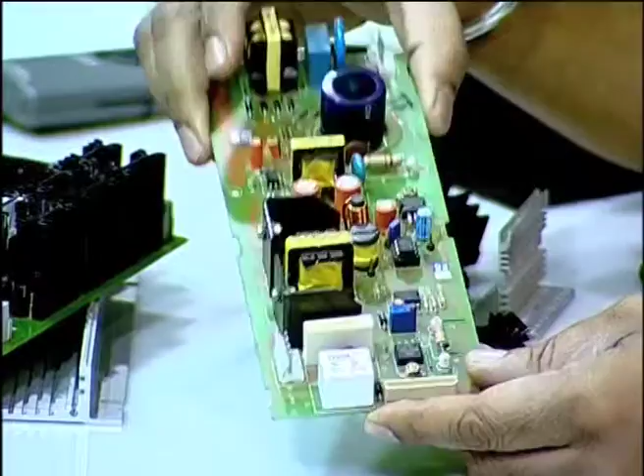If you look at the PCBs, many printed wiring boards which have power components in them will have some form of heat sinking done which will remove the heat from the components.

Look at this particular component. This is nothing but an aluminum plate bent in the shape of an L. Look within, you will see the component here. This is a TO-220 package component mounted on the PCB. The leads are mounted on the PCB right here, or maybe it is clearer here, and the body is affixed to this aluminum plate, which will act as a heat sink.

This is a very simple heat sink, but you have different varieties of heat sinks. For example, take this particular board here, where the heat sinking is by extruded aluminum lengths. These are aluminum extrusions, and inside you will see the components placed. The leads come out here, three leads, which are those of the components, and these are also used basically to keep the junction temperature of those particular power components cool.

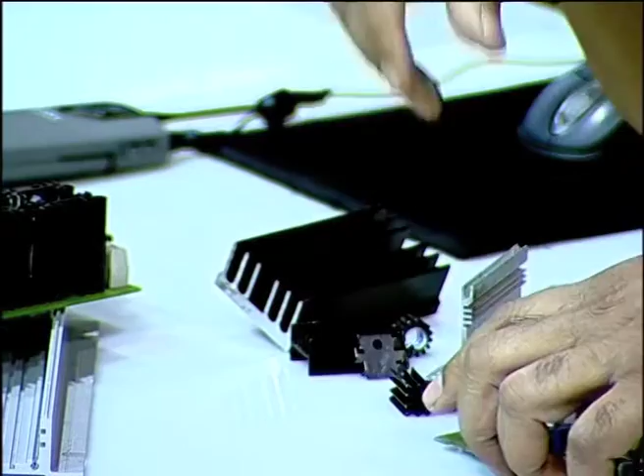You see another type of heat sinking here. Likewise, you have different shapes. There is another heat sink which is of a different cross section. This is also aluminum extrusion, another PCB mountable heat sink.

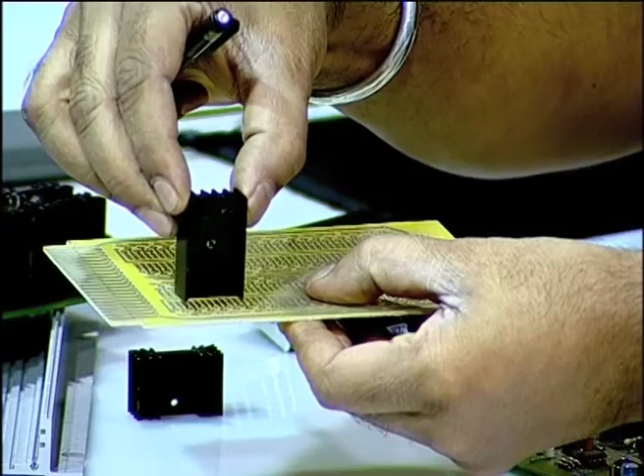You have a possibility of attaching it to the printed wiring board through a screw, here a mounting hole. The component will be mounted here and onto the PCB, which will probably fit something like this. We mount it in this fashion with the component leads going into the PCB.

You also have these type of cylindrical cross section heat sinks. These are for the TO-5 package type of devices which are circular, maybe op amps also, and some BJTs which have a circular cross section like that, and it is fixed around that, and mounted onto the PCB like that. So you have many such heat sinks.

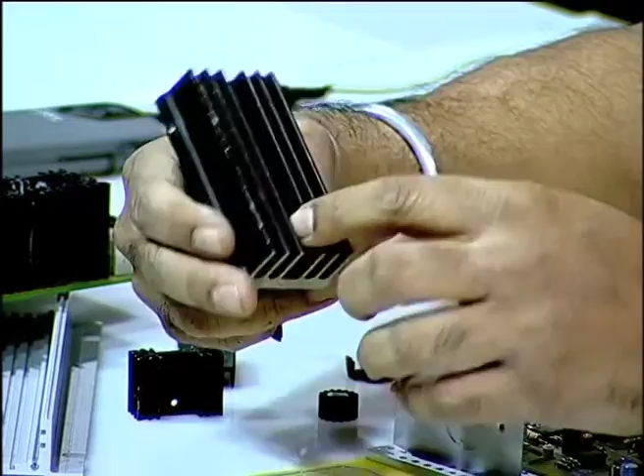This is another type of extrusion piece with components mounted through that. The leads will go in through these holes and onto the PCB. You have another type of a bit more heavier heat sink with a different cross section here. The components are mounted inside and fixed to the enclosure through these mounting holes.

So you have heat sinks of varying sizes, still further bigger ones, depending upon the type of heat that has to be removed from the junction. The culprit, of course, is the heat source actually at the semiconductor junction, and the semiconductor junction is the source of heat which is actually coming as a consequence of current flowing through it and a potential across it.

And therefore, today's main discussion is on the thermal aspects. This is what we will be talking on.

The junction temperature in most semiconductor devices that you will be using would have an upper limit of 150 degrees centigrade. This is actually the breaking point. You should never go to that, and almost all designs will see to it that the junction temperature is less than 120 degrees centigrade. It should not go beyond that, even at an ambient temperature of 50 degrees centigrade.

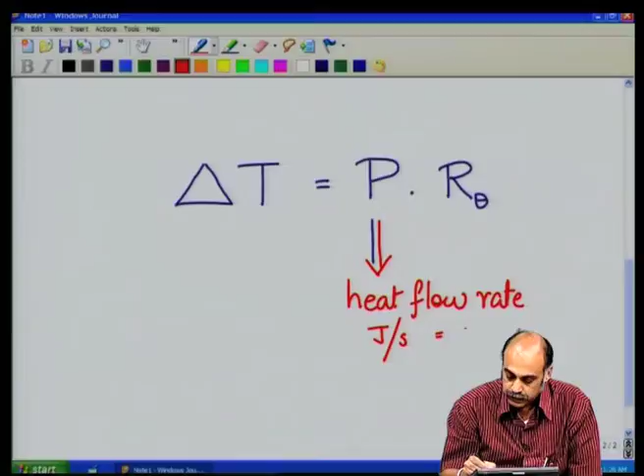P is nothing but heat flow rate. Heat is having units of energy, that is joule, and heat flow rate is joule per second, which is nothing but watts. So heat flow rate is nothing but the power dissipated within that particular component.

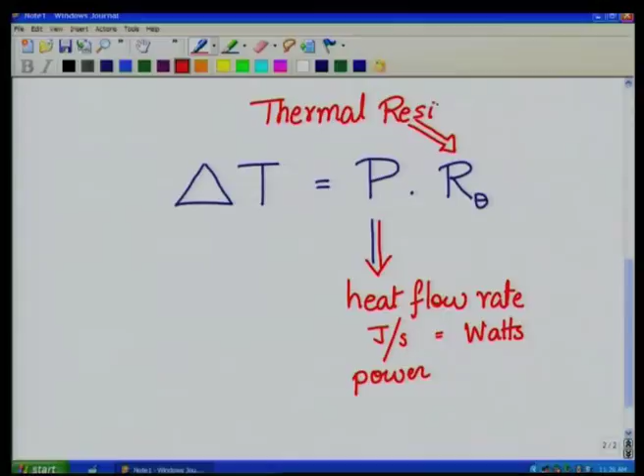And you have another parameter which comes here, which is the property of the material, and this is called the thermal resistance. Thermal resistance is not actually the resistance like in the electrical sense. It is not a dissipator. It is only going to impede the flow of heat. It is a measure of the speed with which the heat can be conducted away, can be removed away from the hot source. So this needs to be understood in that fashion. The thermal resistance here just means the speed at which the heat can be removed from the hot source.

Now, this equation is the governing equation, and for electrical engineers they say that this is something equivalent to Ohm's law, as we know in electrical engineering, V which is equal to I into R, something similar to that, but not exactly the same.

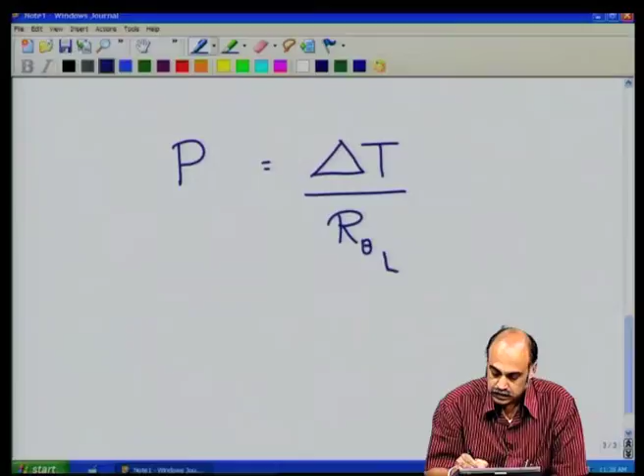Now the heat flow power P, rewriting it, we have the temperature difference divided by R theta or R thermal, this is called the thermal resistance. Now this has a unit. Remember, if you write it in a different way, R thermal is equal to delta T by P, and therefore the units of this is degree Kelvin per watt. Degree Kelvin per watt is the units of the thermal resistance. Keep that in mind.

Now this form is a very generic form, but there are many derived forms, and many literature give this law in different notations and different forms. In order to avoid confusion, let us have a look at the various notations that are there in the literature. They are actually the same thing expressed in a slightly different manner.

Firstly, power sometimes is expressed with respect to unit cross section area, power per unit cross sectional area, given as A R theta. Now what is A? If you have a square block like this, a solid piece of block, let us say this is the hotter side T H, this is the colder side T C, and the heat is flowing from this hotter side to the colder side in this fashion. So delta T is nothing but T H minus T C, and R thermal is the property of this material which is being used. It has an impedance which resists the flow of heat. Good conductors of electricity in many cases are good conductors of heat too.

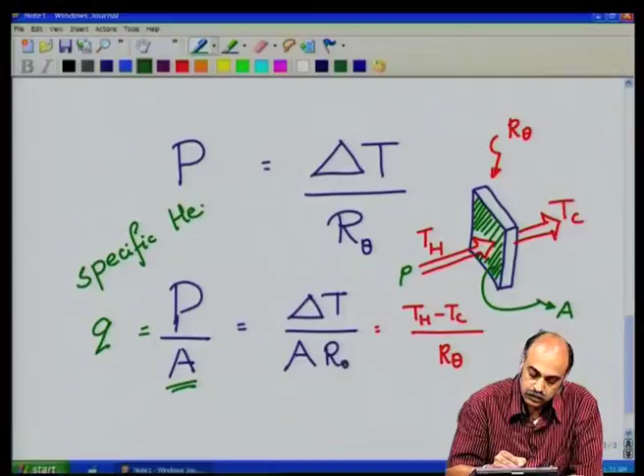Now this particular solid, let us say, has a cross sectional area perpendicular to the heat flow, and that is A. Now that is the A that we are saying power by the cross sectional area is called Q. This is called specific heat flow rate. Q is nothing but the specific heat flow rate, watts per meter square, that is its units.

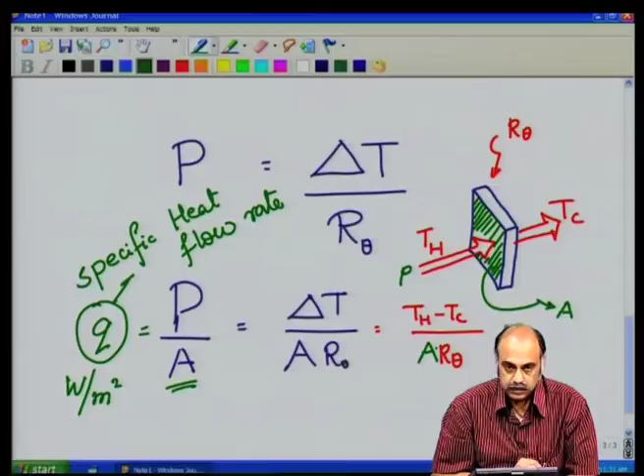So this is one way of expressing this: P is equal to delta T by R theta. You have Q which is equal to P by A, which is equal to delta T by A R theta. Now this A R theta is given a different symbology in many, lowercase r theta. So it is written as delta T by r theta. Now what is this r theta?

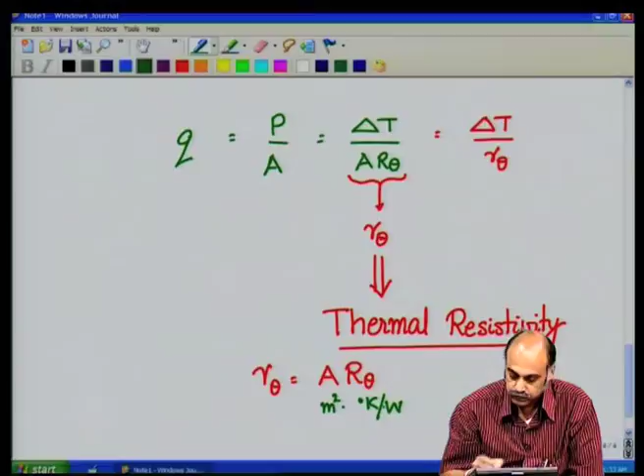This is called thermal resistivity. So we had R, which is the thermal resistance. You have lowercase r theta, which is called the thermal resistivity, which is given by this relation: A into thermal resistance. So you have the units for this, meter square into degree Kelvin per watt. So thermal resistivity is expressed in the units degree Kelvin meter square per watt. So this is one way of looking at it.

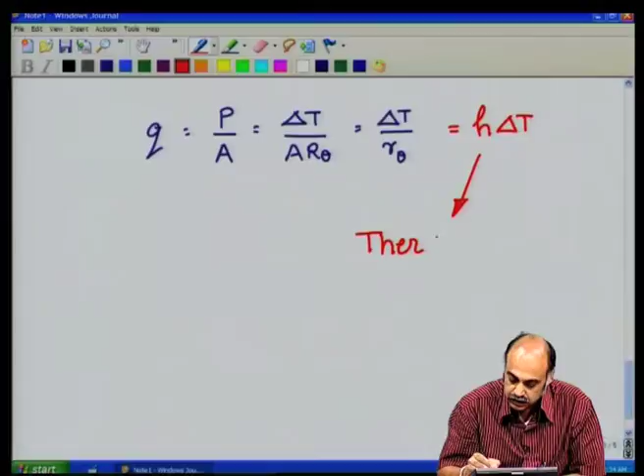So what do we have? We have Q, the specific heat flow rate, which is given by heat flow rate by the area of cross section perpendicular to the heat flow, which is given by delta T by A r theta, which is given by delta T by lowercase r theta, called the thermal resistivity. Now to this there is a different notation: it is equal to H delta T. Now our H is another constant used in many literature, and this is called the thermal coefficient.

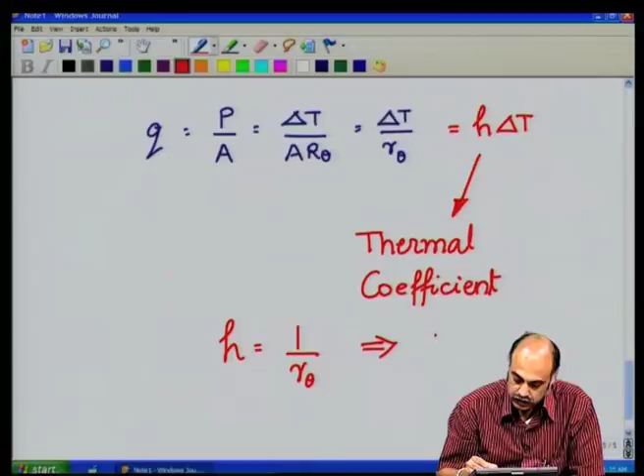H is called the thermal coefficient. It is nothing but 1 by lowercase r theta, 1 by thermal resistivity, and therefore its units: we know that thermal resistivity has units of degree Kelvin meter square per watt. So thermal coefficient will be watt per degree Kelvin per meter square.

So this is another way of expressing the same heat flow equation relationship. There is one more way of expressing the heat flow relationship. Let us take a similar situation where you have a block with temperature T1, the hotter side, and heat flow in this fashion. The area of cross section perpendicular to the flow of heat we shall call A, and the thickness of the block we will call delta x.

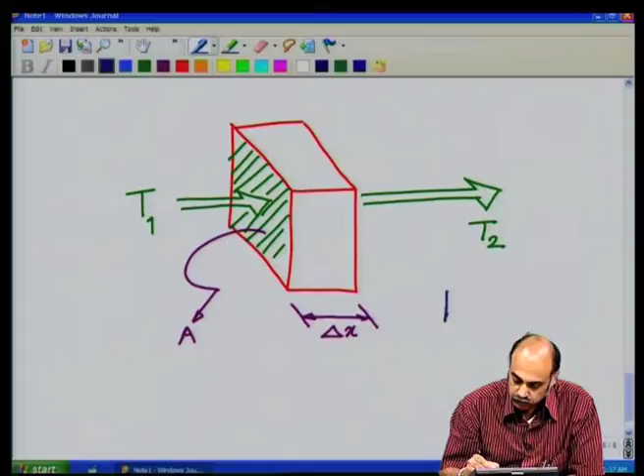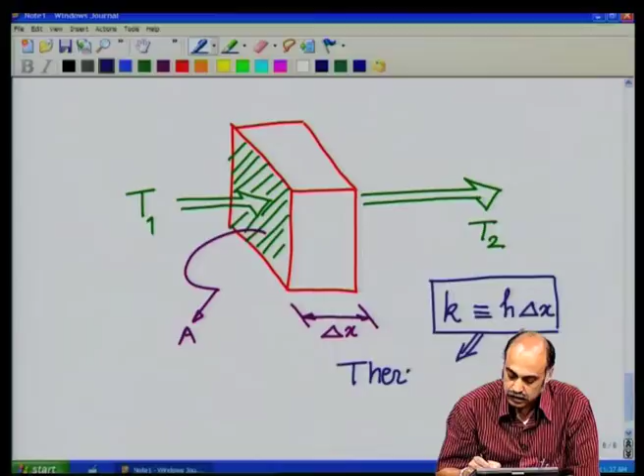Heat is flowing to the colder side, which we call T2. Now the property of the block, which we normally express in terms of thermal resistance, thermal resistivity, or thermal coefficient H, we have one more constant K, which defines the property of the material. This is defined as thermal coefficient H times delta x. This is called in the literature as thermal conductivity, a very popular notation used in many literature, and this gives the famous heat equation form.

So if you take the thermal conductivity K, expressed as H delta x, and we know that the units of H are watt per degree Kelvin per meter square, but there is a delta x in the numerator, so it becomes per meter. So thermal conductivity has units of watt per degree Kelvin per meter.

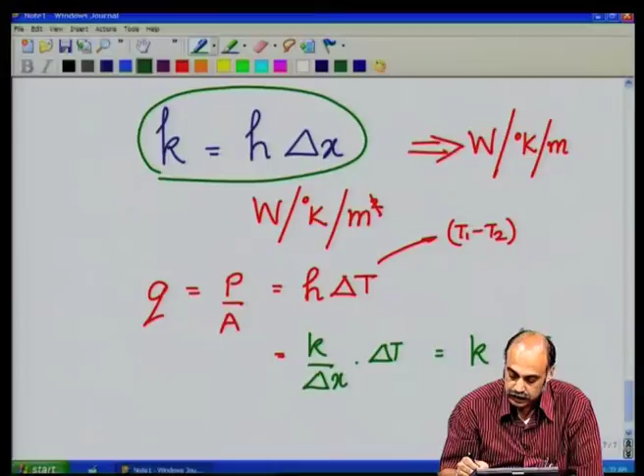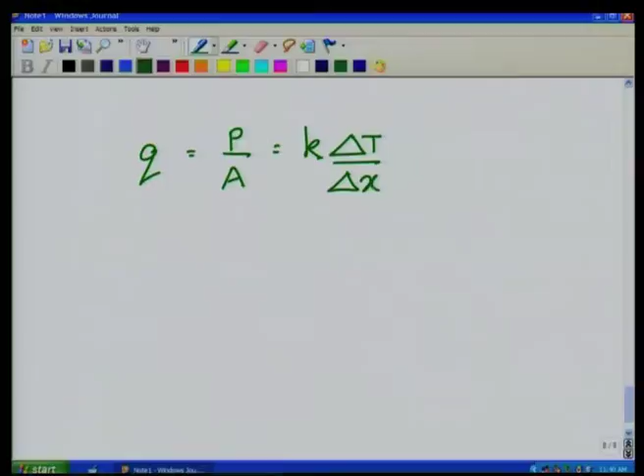So now going back to the equation, Q, the specific heat flow rate given by P by A, which is equal to H delta T, thermal coefficient into the temperature difference. Now this temperature difference is nothing but T1 minus T2 in the case we just described. And if you want to make use of the thermal conductivity equation here, H can be written as K by delta x, so H delta T is nothing but K delta T by delta x. Therefore Q, equal to P by A, equals K delta T by delta x. This is the famous heat flow equation, also written in this form for continuous temperature gradients with respect to distance through the solid.

So this is a very popular expression used in many literature. You should be aware of these things. You saw the same notation used in different forms. Let us summarize so you do not get confused at this point.

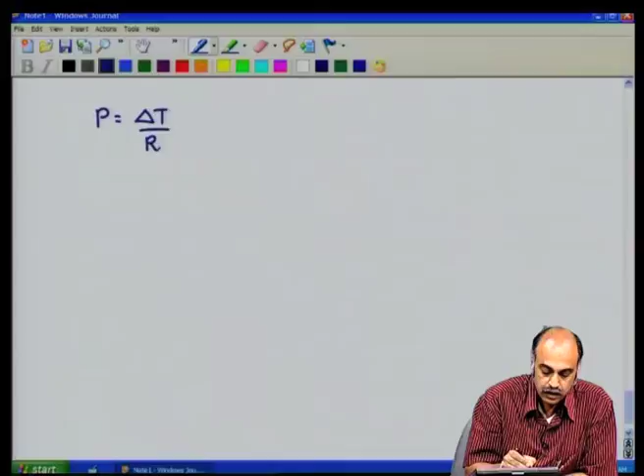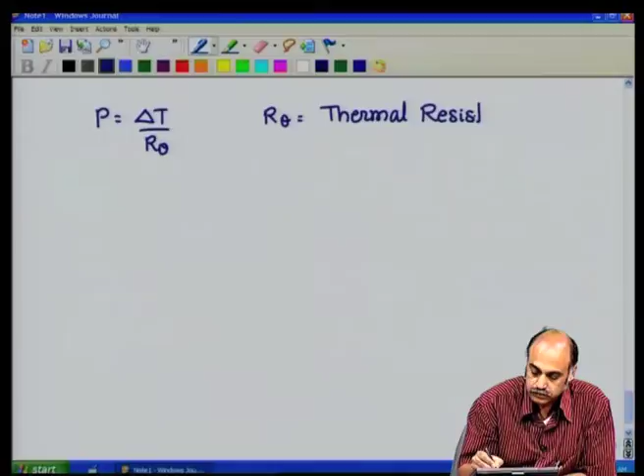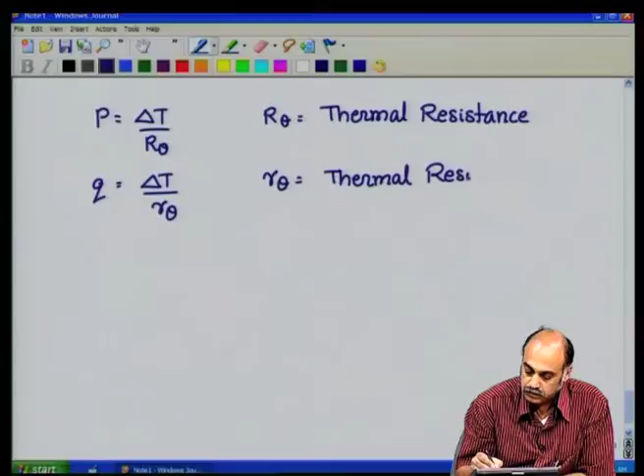We started with P, equal to delta T by R theta, where R theta is called thermal resistance. You have Q, equal to delta T by lowercase r theta, where r theta is the thermal resistivity. You have another form, Q equal to H delta T, where H is called the thermal coefficient. And you had the other form, Q equal to K delta T by delta x, where K is called the thermal conductivity. So these are the four forms that are very popular in the literature.

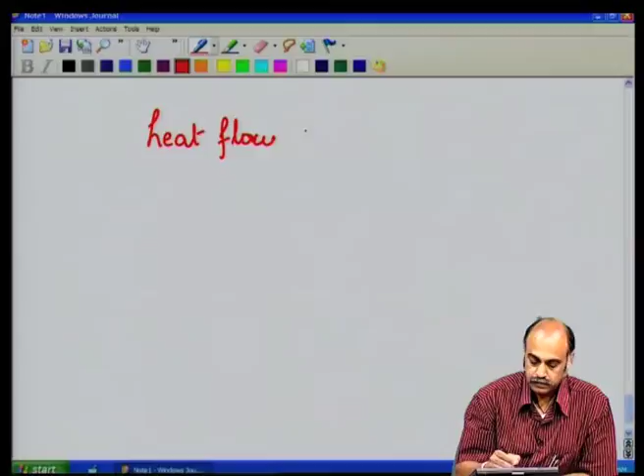You will see these forms are one and the same, except that the notations are slightly different, and you should not get confused when you see one of the forms. You can always convert one form to another: this is nothing but A r theta, this is nothing but 1 by thermal resistivity, and this is nothing but thermal coefficient into delta x. So this is the basic relationship of heat flow rate, heat flow energy, temperature difference or temperature gradient, and the material property.

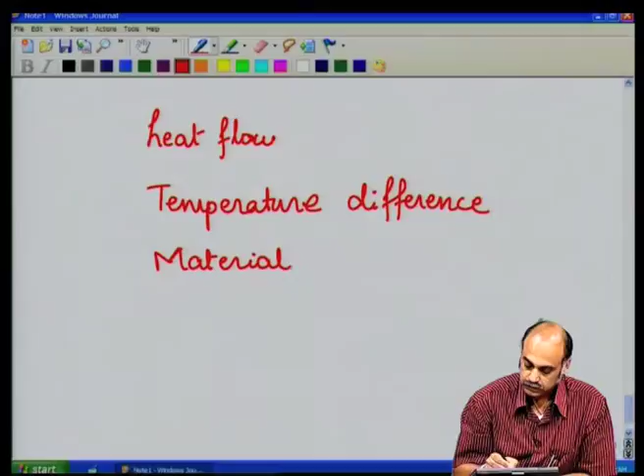The material property is represented by thermal resistance, thermal resistivity, thermal coefficient, thermal conductivity and such. These are measurable quantities. The potential is temperature of the hot minus temperature of the cold, the two points where heat flow occurs. The heat flow rate is nothing but the power dissipated within the semiconductor, which comes from the electrical circuit equivalent analysis. So you know the currents flowing through the various components, the voltage across them, and from that you derive the power getting dissipated within the semiconductor junction, in diodes, BJTs, MOSFETs, ICs, magnetic components, capacitances and inductances. Once you know the power dissipated, it is a matter of getting it into the thermal domain and relating it with the material properties in this fashion.

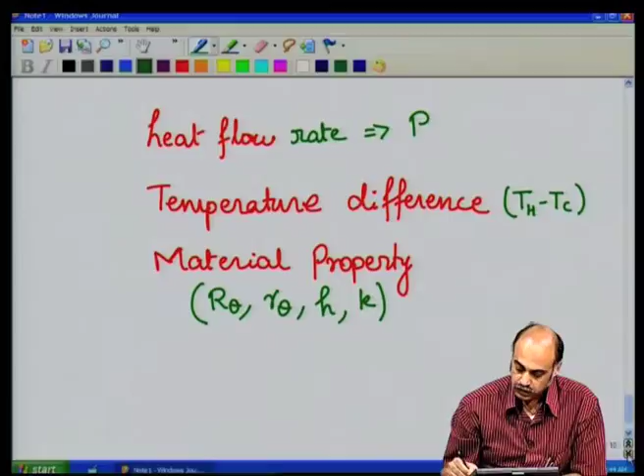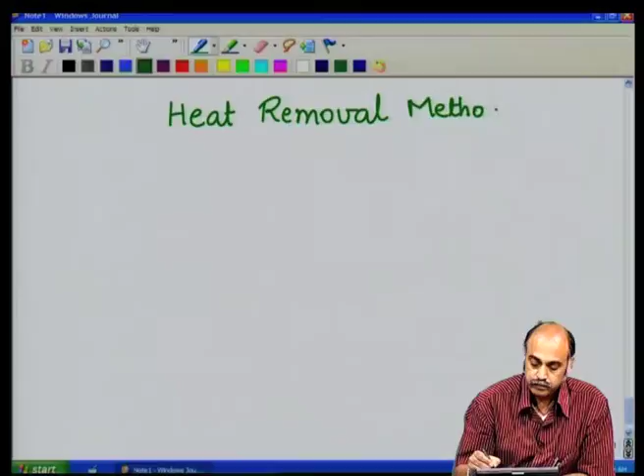So, heat removal methods. Our main motivation for this topic is that there is dissipation occurring within the components, and we want to remove the heat so that we can keep the junction of the components cool enough and working reliably.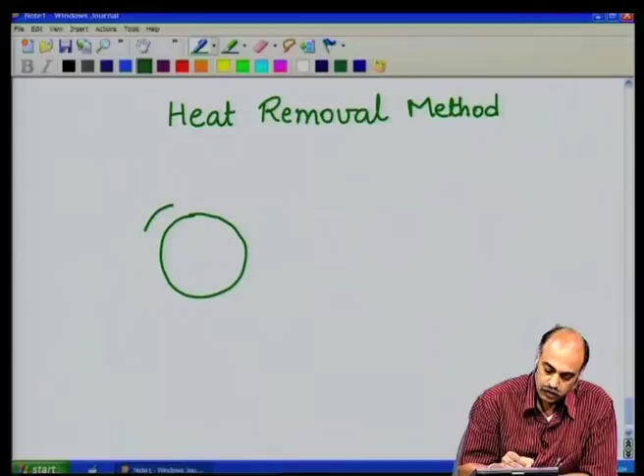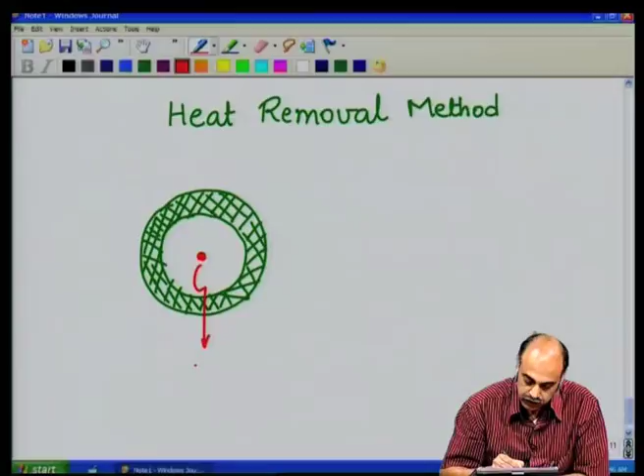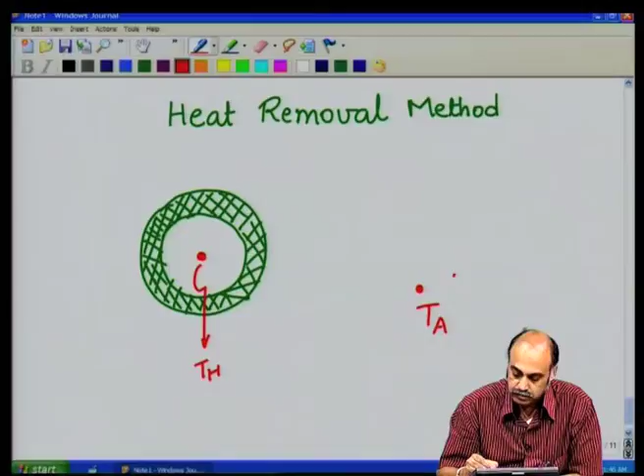Take for example a closed space, having a solid enclosure as shown. This solid enclosure contains a hot spot, shown here in red, which is the highest temperature point in the system, let us say TH. This heat source should ultimately get conducted to the ambient, TA. Let us say the ambient maximum is around 50 degree centigrade, and this hot spot is much greater, around 120 degree centigrade.

Now what all can happen? The heat energy needs to reach the inner surface of the solid, and it can reach in all directions. The inner surface of this enclosure is at some temperature, T surface inner, and the heat is to be conducted from this inner surface to the outer surface, in all directions.

I am showing these wiggly arrows to indicate the heat flow, and the temperature at the outer surface we will call TSO, T surface outer temperature. From this outer temperature the heat is supposed to go out to the ambient in all directions. So this is the typical way the heat flow happens, but let's look at the mode.

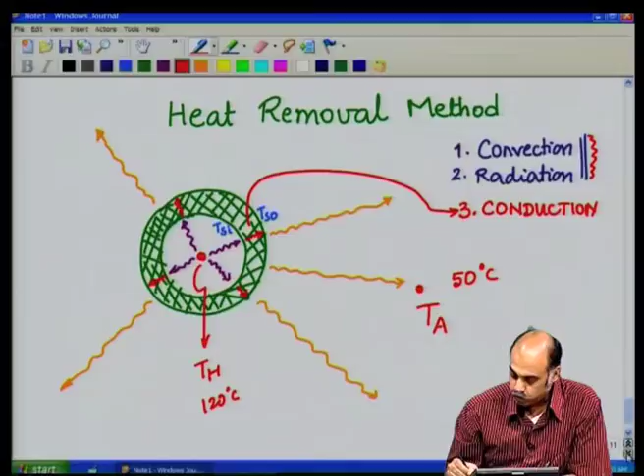Once you are at the inner surface solid, the heat has to get conducted to the outer surface through the solid, and this method of heat conduction through the solid is called conduction. Again, when it reaches the outer surface, it goes through the air or some other fluid medium, again through convection and radiation. So we do not have too many methods to deal with - you have just 3 plus 1, I will explain what that plus 1 is.

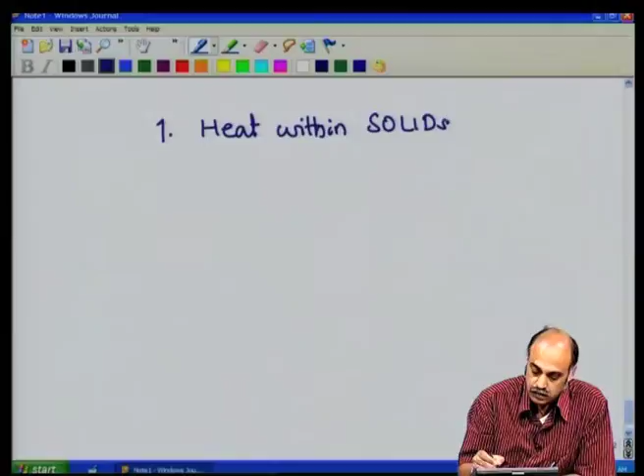Heat flow within solids we call conduction. Heat flow at a solid fluid interface we call convection. So for convection you need to have a fluid interfacing with the solid, so that the fluid is the actual medium which is removing or conducting the heat away.

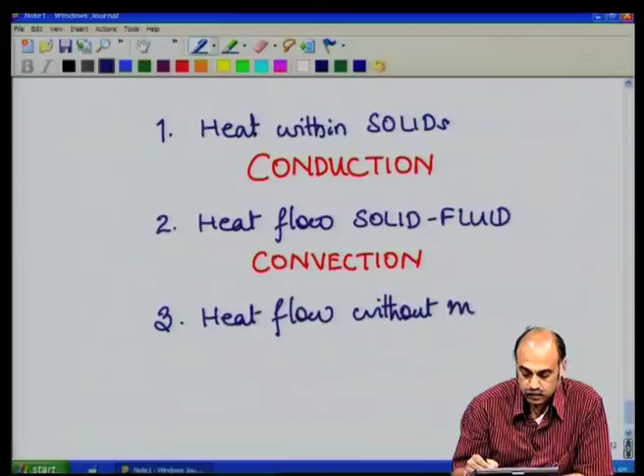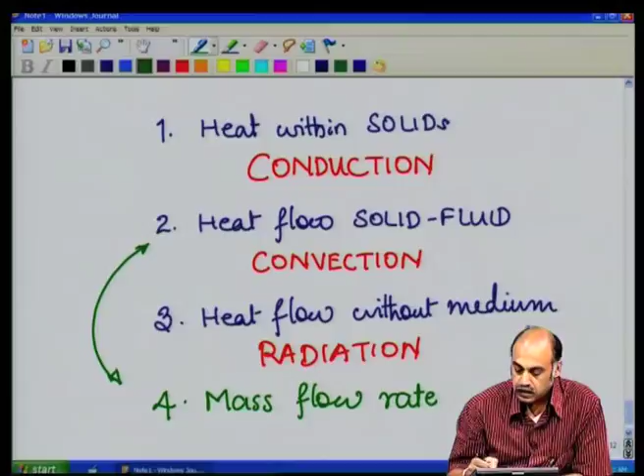The third method is heat flow without a medium, through radiation - this is called radiation. There is one more method, which I shall put in green. It is also in some way linked with convection, also a solid fluid interface. This is called mass flow rate - heat transfer through the mass flow rate mechanism.

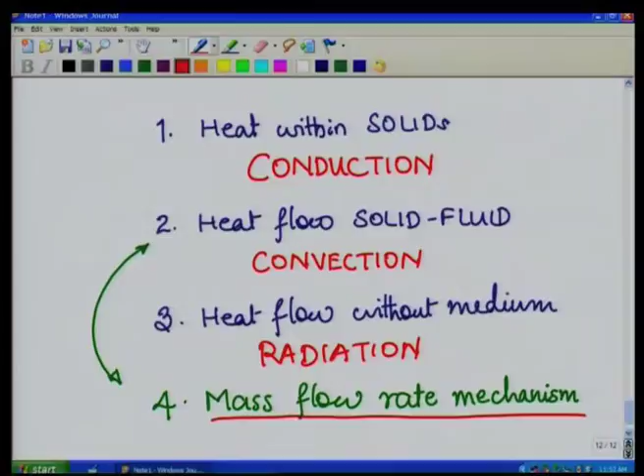In convection, the fluid flow is not tightly controlled or regulated, whereas in the mass flow rate mechanism the fluid flow is tightly regulated. Therefore you have this as a separate mechanism, part of the convection mechanism, and we call that the mass flow rate mechanism. So these are the 4 basic types of methods used for conducting the heat away from the junction.

So now coming to the methods by which you try to remove the heat away.

Let me show some scenarios which will give you the basic idea, probably first a simple explanation with conduction.

So let us take an example where we are trying to conduct heat from the semiconductor to the ambient. Let us say we have some solid material where this portion is the hot portion, at temperature T h, and this portion is the cold portion, at temperature T c. The heat will flow from the hot to the cold in this manner.

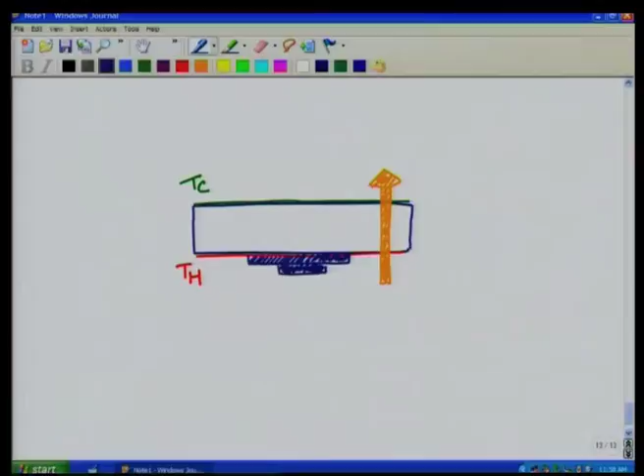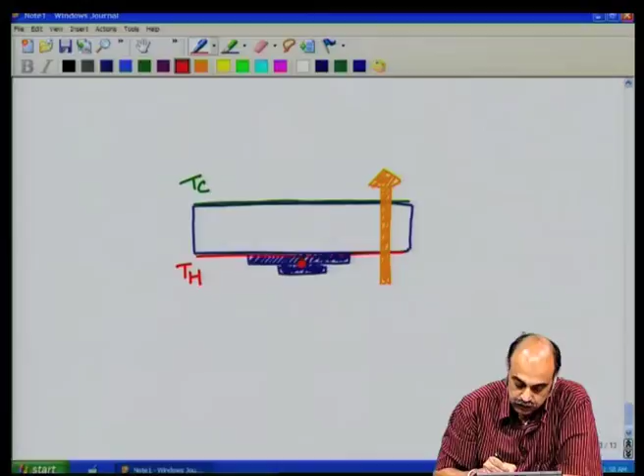Now if you look at these components here in this PCB, you see that this component is fixed to this aluminum plate here. So the hot spot is within this component at the junction, and that has to be removed out to the ambient. So here this component is having a hot spot, and that is called the junction temperature T j.

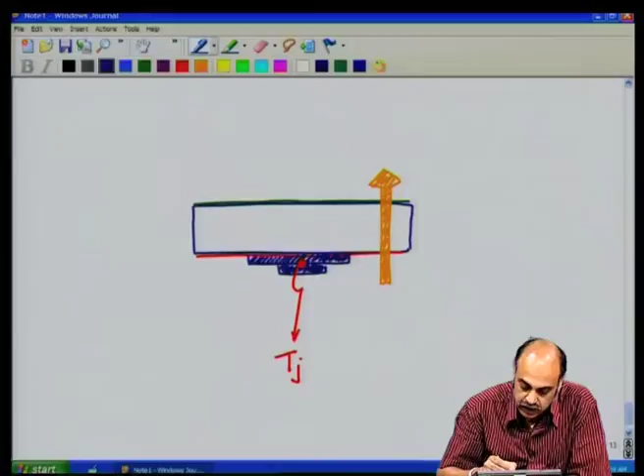Now let me erase this portion, these symbols, and make way for new symbols. The heat flows from the junction, the hot spot, to the case, the surrounding case. The surrounding case, the blue colored one, is at temperature T c, which is lower than the junction, and from there the power flows on to the heat sink, the bottom portion of the heat sink as shown here.

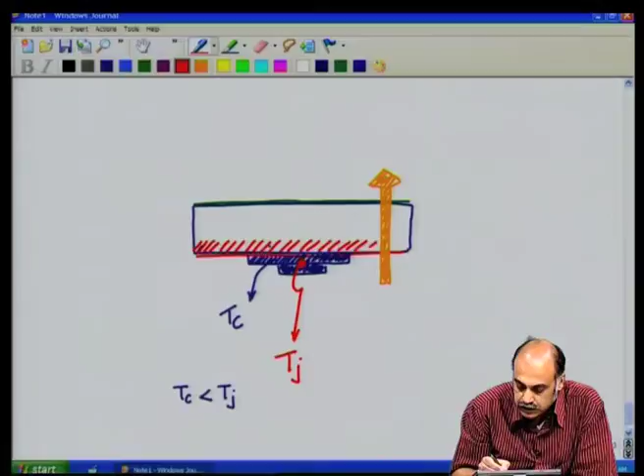Now there is a temperature gradient. You will see that heat starts flowing from the bottom to the top as shown, and somewhere here we will say is the ambient, which is at around 50 degrees centigrade. So the junction is at around 120 degrees centigrade, and we want the heat to flow in this fashion.

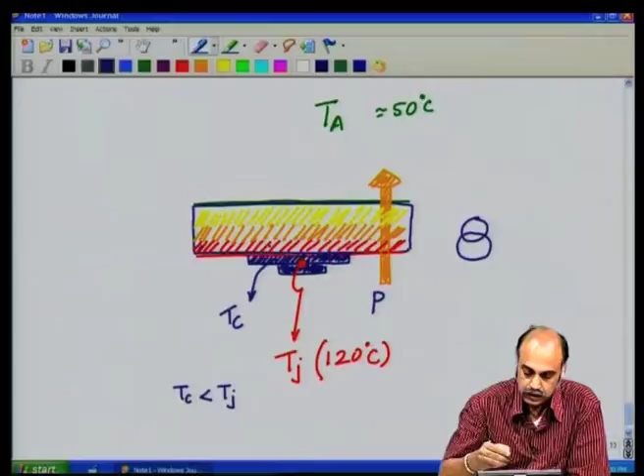Now how do we model this? Okay, so let us, the power flow P, the power flow P is modeled as a current source like this. I will reposition things in a slightly different way. Yeah, is modeled as a power source like that.

Now this power source is basically the dissipation which is happening within the junction. Now the power source which is generated at the junction is at junction temperature with respect to ambient T amb.

Now there is a thermal resistance between junction and the case. So this is the junction, this is the case, and results in a temperature T c at the case, slightly lesser, due to the presence of a thermal resistance R theta junction to case, R theta J C, let us say.

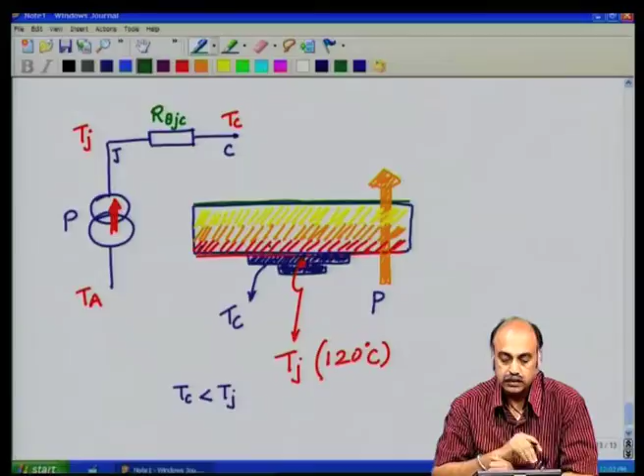Then from the case, the component is attached to the aluminum block or the heat sink block through a compound called heat sink compound, which is supposed to make proper contact with the surface of the heat sink. So that also is going to bring about a thermal impedance from case to sink, giving rise to another thermal impedance, case to sink.

And then from the sink to the ambient, the sink is at sink temperature, the average sink temperature, I will put this one as T s, and somewhere outside you have the ambient. R thermal sink to ambient, there is a resistance there. So electrically you will see that it is equivalent to a current sourced circuit. This is ground and this is ground, a reference potential. The ambient is called the reference potential.

So looking at this figure, it's very easy to get the equation. The R thermal junction to case is the property of that particular semiconductor or semiconductor IC or the component from the junction to its case, which is generally given in the data sheet. This is given in the data sheet.

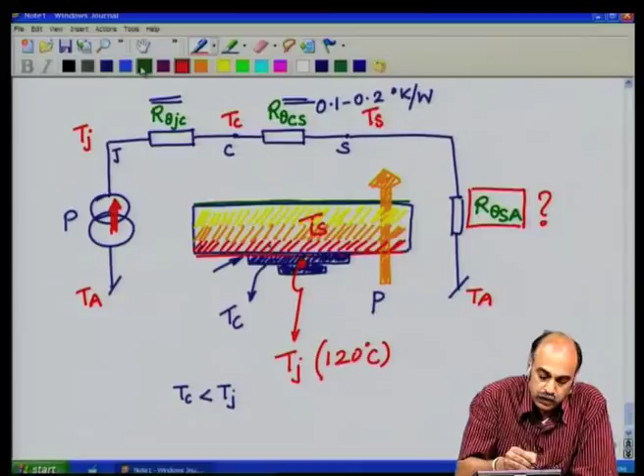So what is the governing equation? We know that P equals delta T by R thermal. This is our basic governing equation. Now let us reframe this equation in the following manner: R thermal is equal to delta T by P, or we should say delta T is nothing but T j, the junction temperature, minus T A, the ambient temperature, divided by P.

This is the total thermal resistance which you see in this whole link from T j to T A. So what is it? That is equal to R theta junction to case plus R theta case to sink plus R theta sink to ambient.

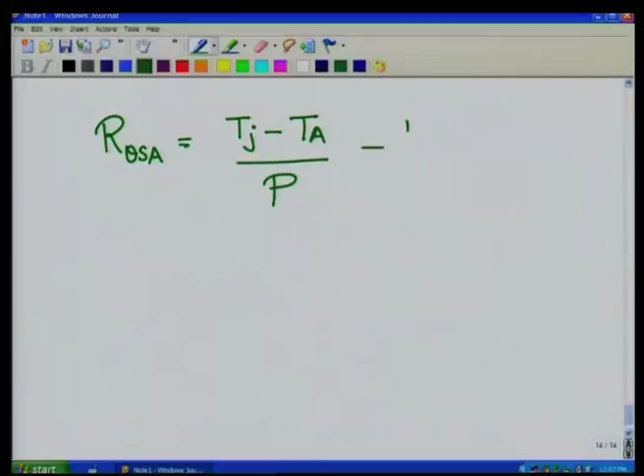So, this can be rewritten in the following manner: R theta sink to ambient. This is what you normally would need to buy from the market, which is given by T junction temperature minus T ambient temperature by the heat power flow rate, minus R theta junction to case, minus R theta case to sink. So this would be the governing equation by which you go and buy a particular heat sink.

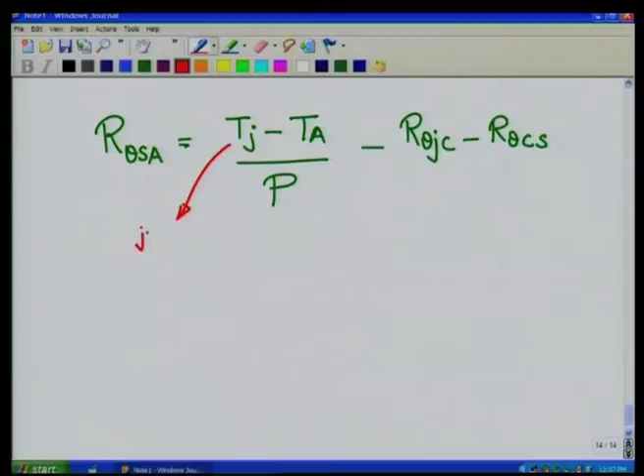So this Tj is the junction temperature, and for most semiconductors it is 150 degree centigrade max, and normally we do not allow it to go more than 120 degree centigrade.

T ambient, this is not the room temperature. Keep that in mind, this is not the room temperature. This is the temperature in the immediate neighborhood of the heat sink. So if you have an enclosure...

Let us say you have an enclosure like this, and this heat sink, this particular card is supposed to fit into this enclosure like this. Let me fix this. So let us say this is going to fit like this.

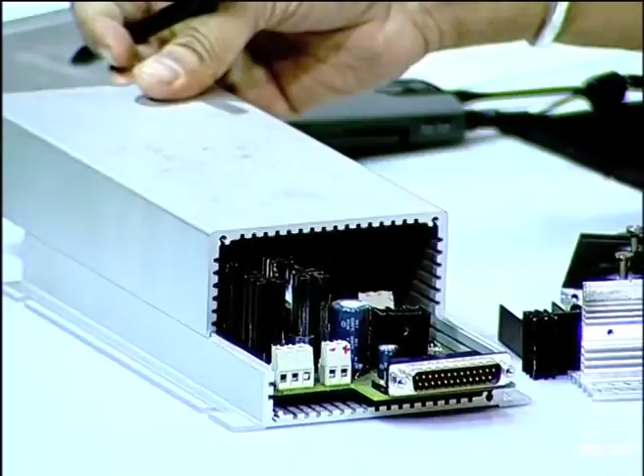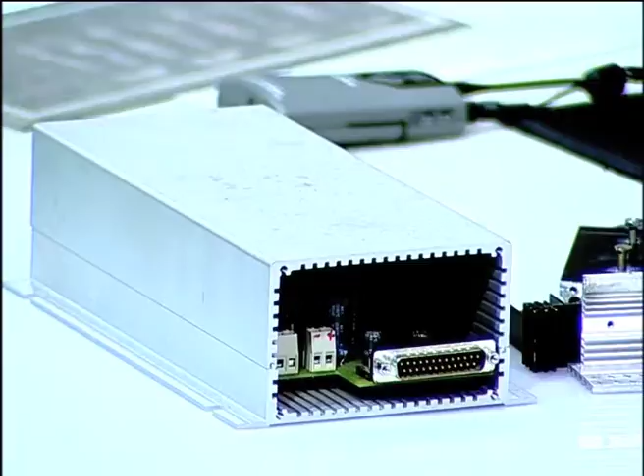It is not TA, it does not mean the temperature of the room which is surrounding this enclosure. It is the temperature in the immediate neighborhood of the component of the heat sink within the enclosure, which will be at a higher temperature than the room temperature when all these enclosures are closed and packed. So this is the temperature which should be designed normally for around 50 degree centigrade, much higher than the room temperature.

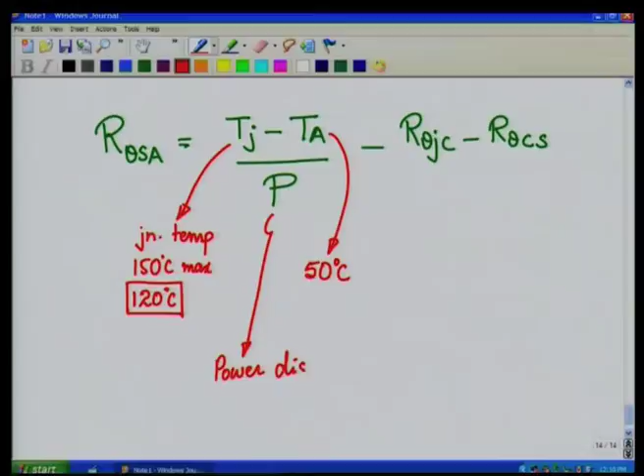And this P is the power dissipation within the component. This is calculated from circuit analysis.

This portion R theta JC, for that specific component, you can get this from the data sheet of the component. The electrical data sheet of the component itself will give R theta junction to case. This depends upon the quality of the contact made by the component with the heat sink, and this varies by around 0.1 to 0.2 degree Kelvin per watt.

So, knowing all this, one can calculate this and put the required value, and from the market get the heat sink according to the thermal resistance requirement of sink to ambient, and connect it to the component.

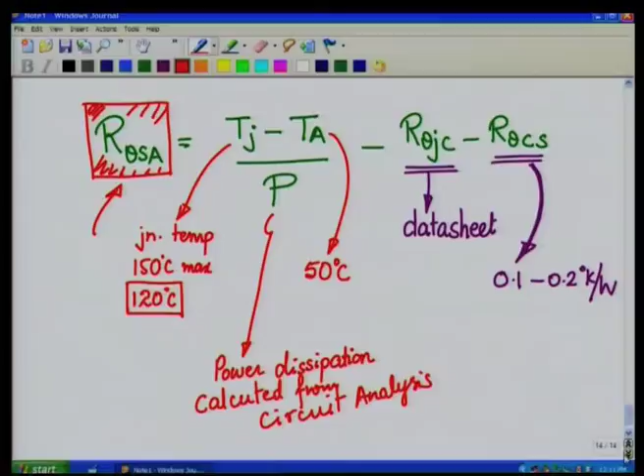While you are mounting the component, let us say that we have a flat piece of heat sink, and let me draw the heat sink like this. Let us say this is your heat sink. One particular cross section.

The component is mounted on this. If the component is within the enclosure, then the component is mounted like this and the fins are out. Sometimes the components are also mounted from outside with the leads coming in. But in many cases the leads are on the side of the component, in which case it has to be mounted inside the enclosure. So that has to be accordingly decided.

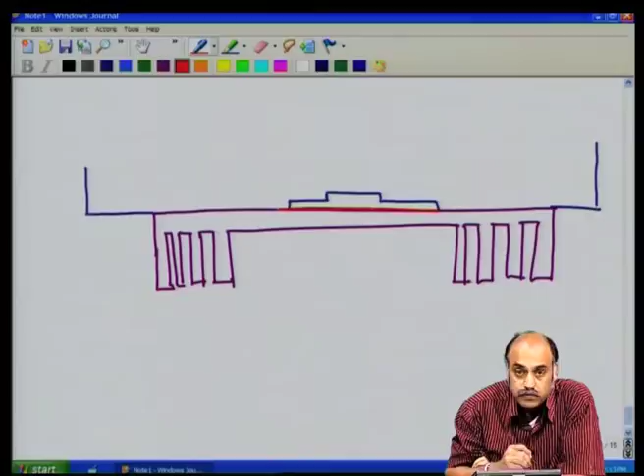Now, what is crucial is if you zoom in to the surface here, let me remove that. The surface is not actually smooth, it is very jagged. So this is an extremely zoomed case, and on that if you mount the component...

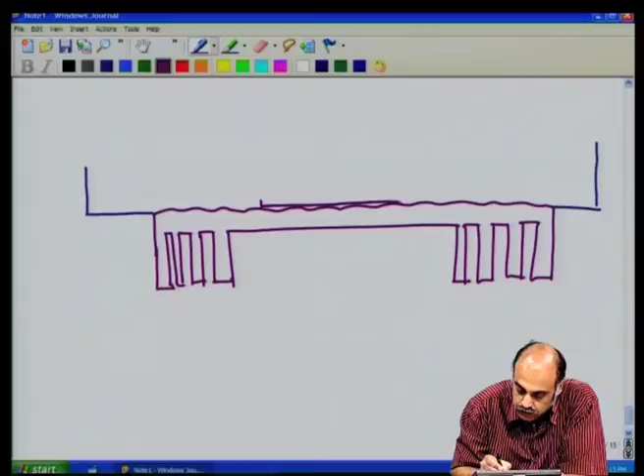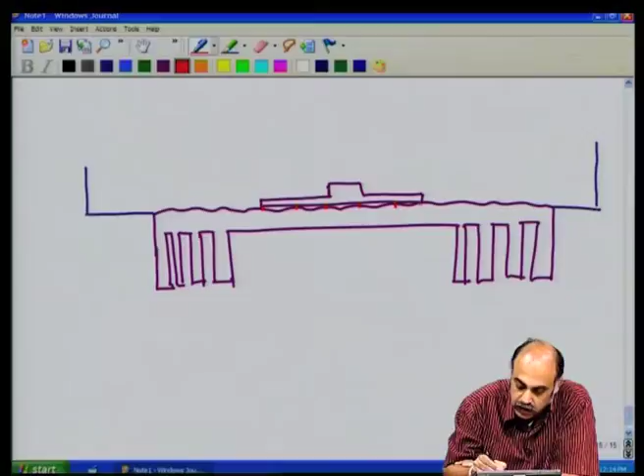You will see that these micro hills will actually make point contact. It will only make point contact with the component, and therefore the contact will not be good, and as a result R theta CS will deteriorate, meaning thermal resistance will become high. It can go even as high as...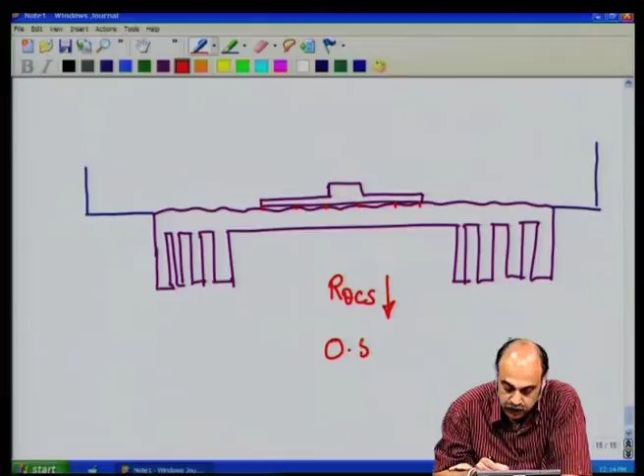between 0.5 degree Kelvin per watt to 1.5 degree Kelvin per watt. This is a poorly fixed component to the heat sink.

Therefore, what is normally done is that to improve the contact, one has to apply a paste which just fills these valleys within the hills. It just fills. You should not apply too much of paste, then you will have a thick layer of paste above the valleys, and therefore again it will deteriorate the contact thermal resistance. You have to apply just that much amount of paste which will just fill the valleys and make very good contact between the component and the heat sink.

These valleys are filled with a paste called heat sink compound. It is a thermally conductive paste.

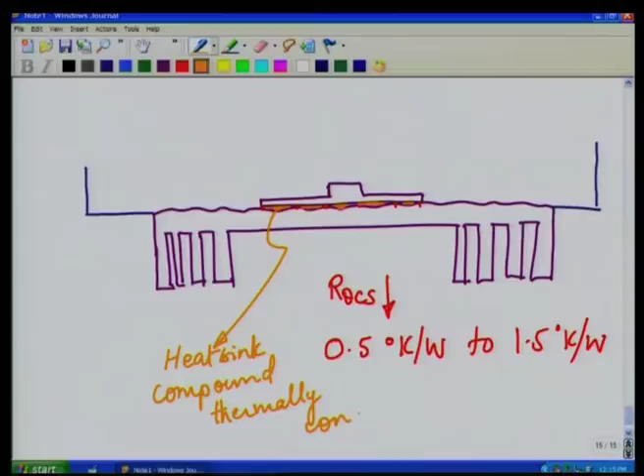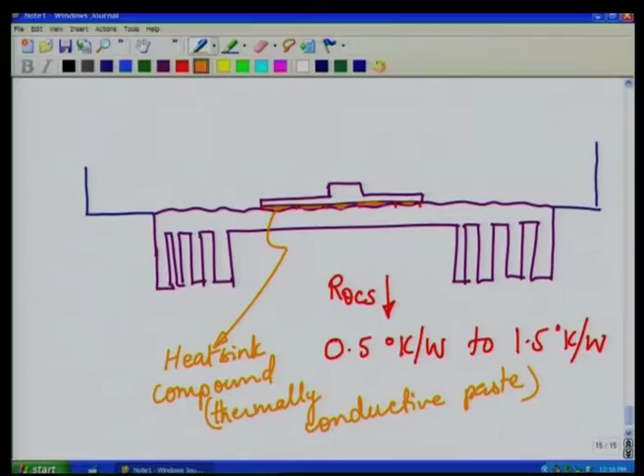That has to be done, it is mandatory if you have to get a good case-to-sink thermal resistance. So, this is the way that the components will be mounted and the heat sink will be used for removing the heat.

In power electronic components, you should note there is one more issue. The heat that can normally be removed by a natural process, without forcing the fluid flow, is limited. Therefore, we may have to apply forced cooling in some high power equipments, in which case fans are used.

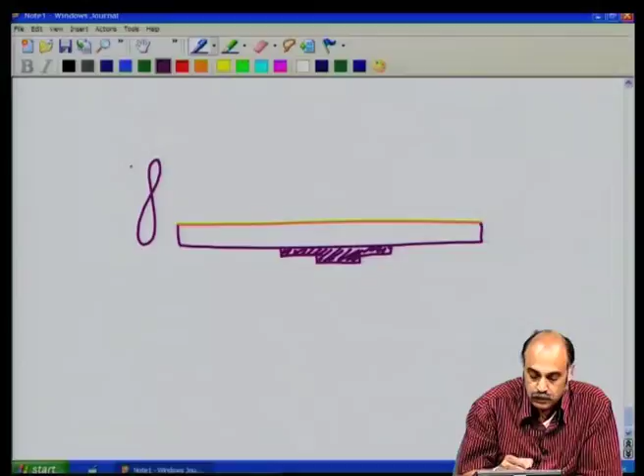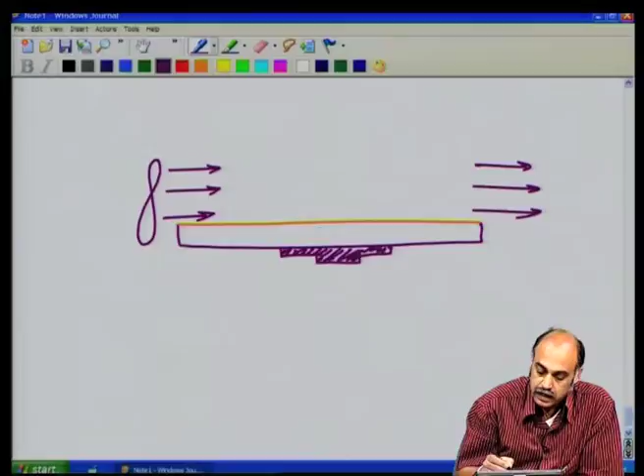So, you must note that if you have a heat sink surface like this, let me show it as a surface like this, and let us say you have mounted a component in this fashion. A fan is also mounted, which will give forced airflow through the top of the surface, and this forced air cooling will give much better thermal resistance. It will lower the thermal resistance drastically and remove the heat away from this component, with the hot spot here, at a much more rapid rate.

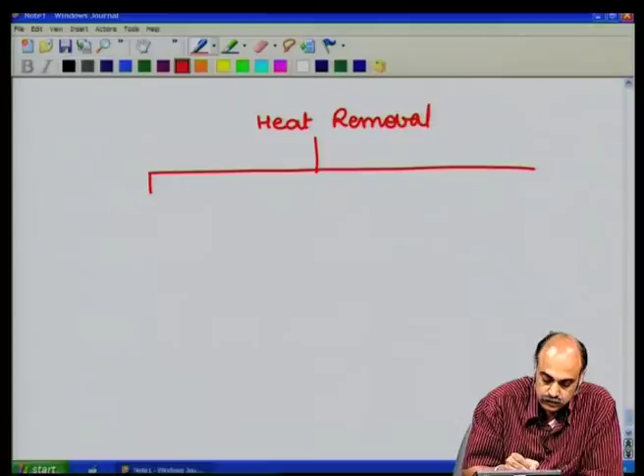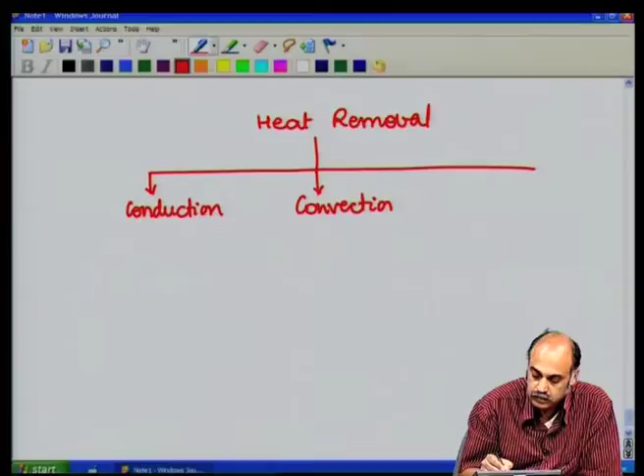So, if you see in the hierarchy, the heat removal methods can be classified like this: you have conduction, you have convection, and you have radiation.

Now, we saw the relationship in the case of conduction, where the specific heat flow rate is given by K delta T by delta X. Similar such relationships exist even in convection and radiation. However, that is out of the scope of this particular class.

However, know that there are two methods in which you bring about convection. One is natural convection, and the other of course is forced convection. In natural convection, there is no fan incorporated into the enclosure. The density of the air changes as it becomes hot, it rises up and cooler air comes down, and there is a fluid cycle due to the natural density gradient that occurs.

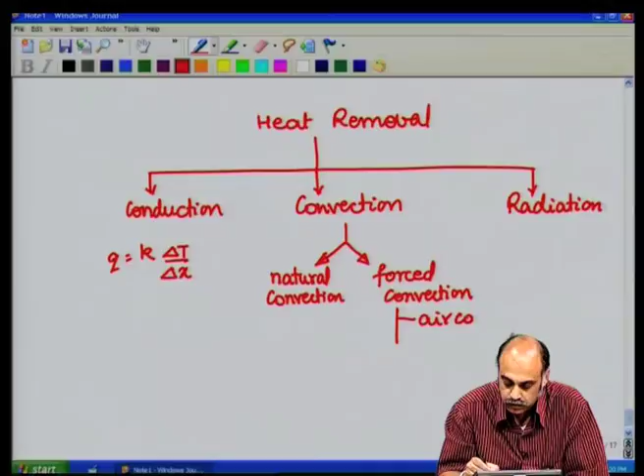Forced convection, as I mentioned, is through the application of forced cooling, either forced air cooling or forced liquid cooling. Liquid cooling gives much lower thermal resistance. The thermal resistance of this convection is best obtained by experimentation.

Even though models are available using Nusselt's number, Rayleigh number and Reynolds number for fluid flow, one can arrive at a mathematical model and estimate the value. However, in most cases you will find that the estimates are off by 50 to 100%. Therefore, it is better to experimentally find out the thermal resistance in this case, and so also the thermal resistance for radiation can be estimated. However, that is right now out of the scope of this particular class.

Apart from this, as I said, we have one more method which falls somewhat similar to convection, which is mass transport.

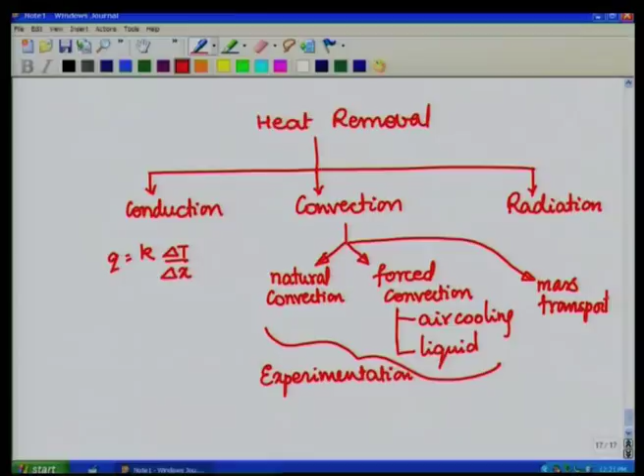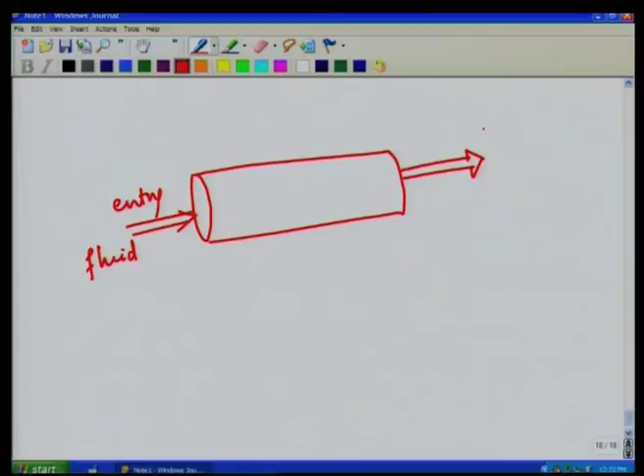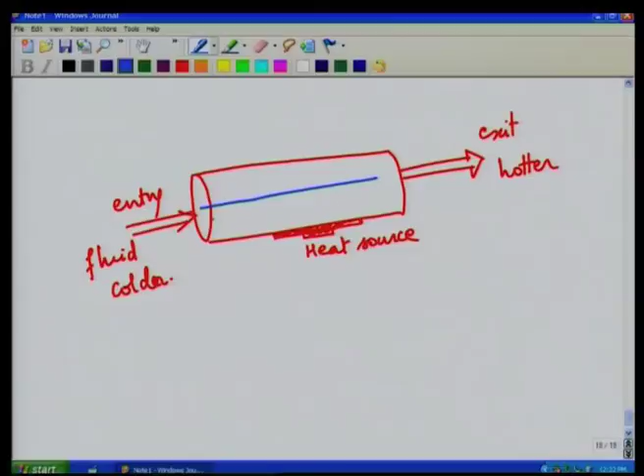In mass transport, what is actually done is, let us say, you have a pipe, and the fluid, which could be oil or water, is allowed to flow through this pipe. It exits out, with entry at lower temperature and exit at hotter temperature, and the heat source is here in between. This is the hot body, and the fluid flow within the pipe is controlled at a controlled flow rate. That power is given by the mass flow rate into Cp into delta T. If this is T1 and this is T2, delta T is nothing but T2 minus T1.

So, the amount of heat that is conducted away from this heat source is given by the mass flow rate of the fluid times Cp, called the specific heat of the particular fluid, times the temperature difference. By far, mass flow rate can give you some of the least thermal resistance and can conduct away the heat at a very good rate.

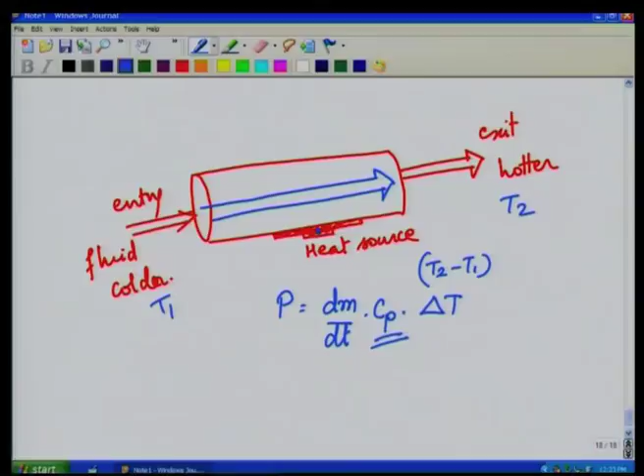So, these are some of the methods that we have seen, and this is just a basic class on the thermal aspects, used to sensitize you to the problems involved in thermal aspects and how heat is removed away to the ambient. It is very crucial that this is done properly, and the proper functioning of the whole enclosure, the equipment, and the printed wiring board depends upon the goodness with which you are able to remove the heat away from the junction. Thank you.